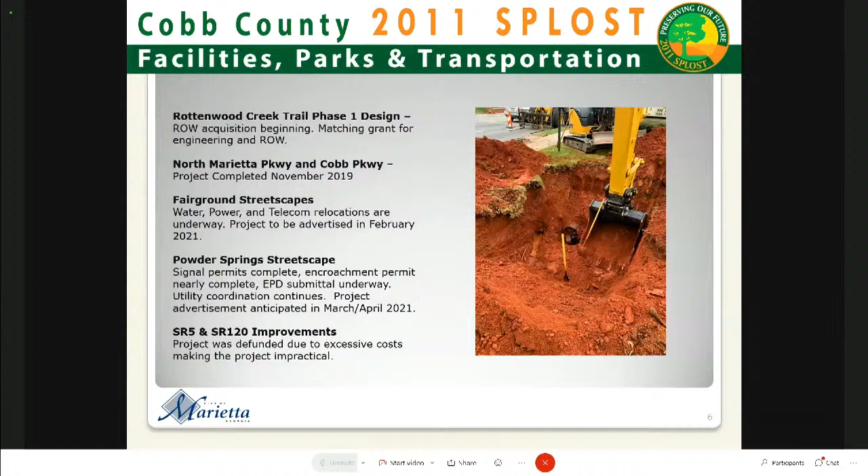Okay, then I'll move to the 2016 update. Last two pictures there we've already talked about, but I'm moving to 2016. Finance has already told you we've received for 2016 more than what we have spent so far, so we're doing good on that. Our finances are holding strong at this point for the 2016 SPLOST.

Go ahead and move to the next slide, please. And the next slide. These are some of our projects that we've completed since the last time we met with you.

We've completed our intersection improvement at Sawyer Road and Canton Road. Also the Kennesaw Mountain Gap Trail project that we had over on Manget, we have completed that now.

We also had a major drainage pipe repair and pipe relining over on Allgood Road there at the corner of Allgood and Cobb Parkway, so we've got that one completed. We had another drainage repair and upgrade over on Church Street right off the square, so we got that completed.

Hickory Drive was during our resurfacing this past summer. We had some issues there with the road being very soft, so we had to go in and do some stabilization with some more base work, and so that was that project.

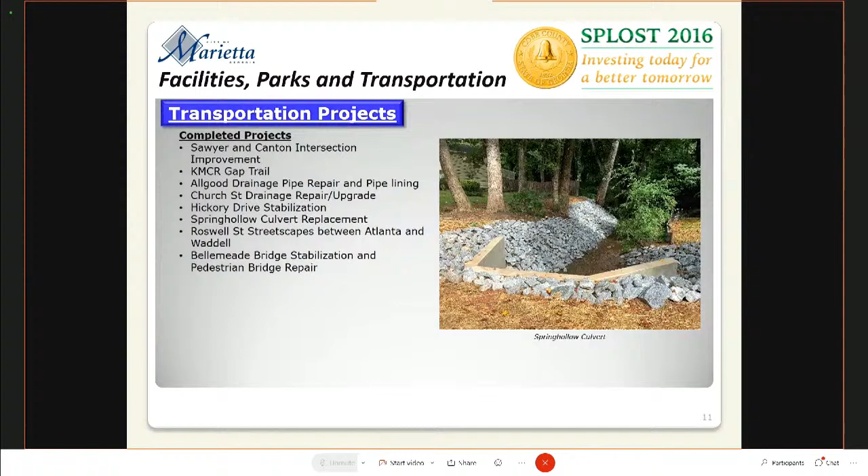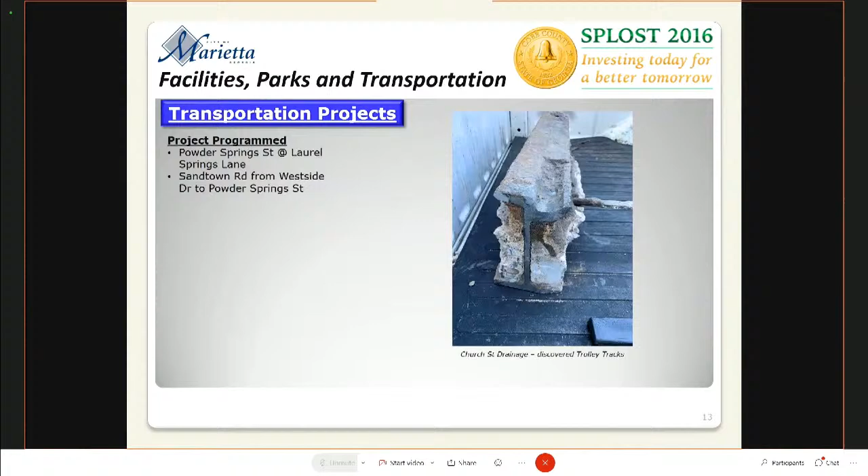So that's all I have for the 2016. I'll be happy to answer any questions if anybody has any for 2016.

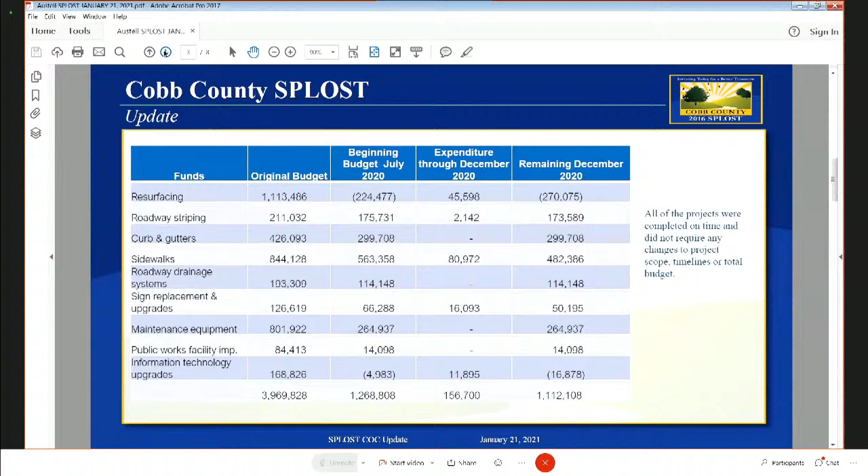On the following slide, you can see the breakdown of where that money was spent. It's primarily resurfacing and sidewalks—that's what 50% of our transportation budget was for, and that's mainly what we spent. We also did some sign replacement and upgrades. The following slide shows the specific roads that were resurfaced, where we installed sidewalks, more specifics about how that money was spent, and the next slide gives you a visual of those. You can see several of the things we did were for ADA compliance, also compliance with reflective signs—that's an ongoing project throughout the city.

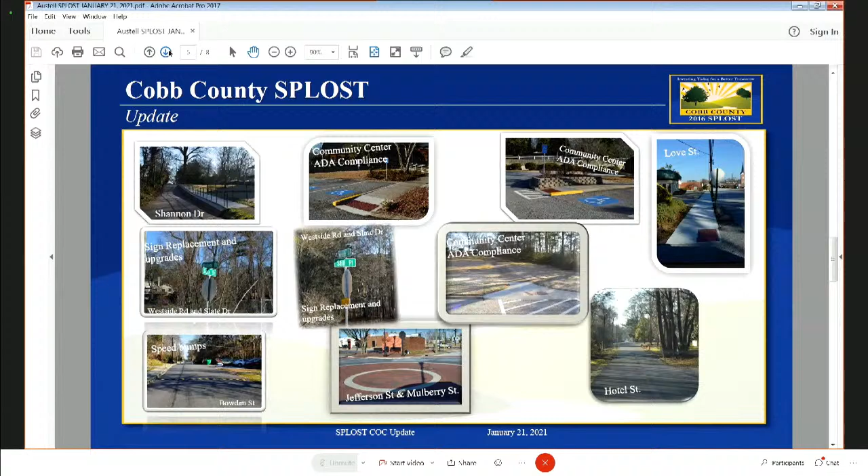Hello, good afternoon, this is Lindsay Edwards, thank you for that. Just a quick question on the new vehicles: I know there was an initiative before from, I believe, the Cobb County office to include some license plate readers on the newer vehicles they were acquiring. Have you all instituted that with the new vehicles, and do you coordinate with Cobb County on that?

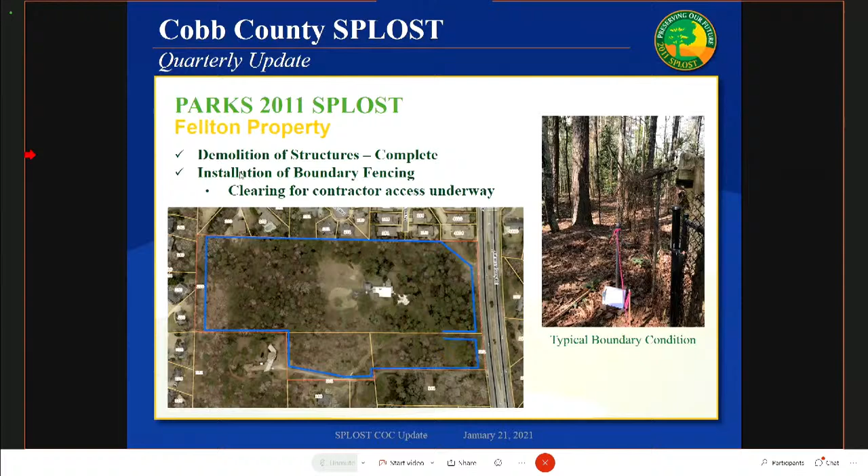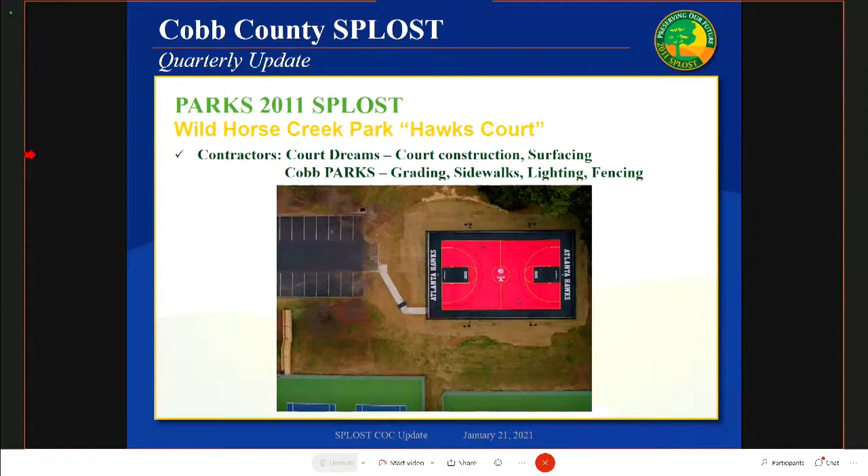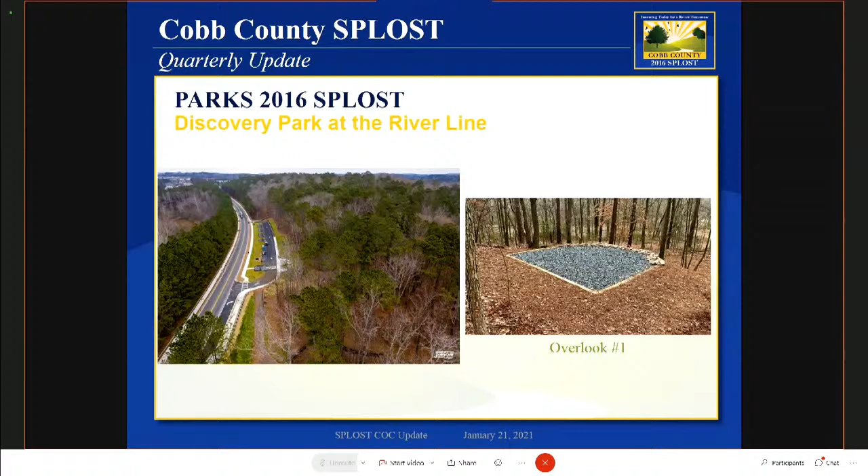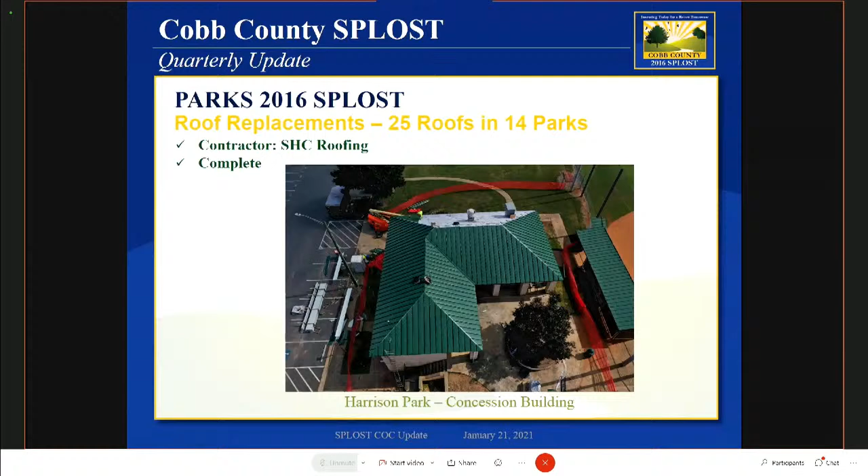The next slide shows a couple of pavilions at Lost Mountain Park. The one on the left is the Upper Hub, Pavilion number 2 at Lost Mountain, and the one on the right is the Lower Pavilion at the Lower Hub. You can see they're existing older buildings that now have brand new roofs, so they'll continue to become even older buildings because they'll last a lot longer with a nice new roof.

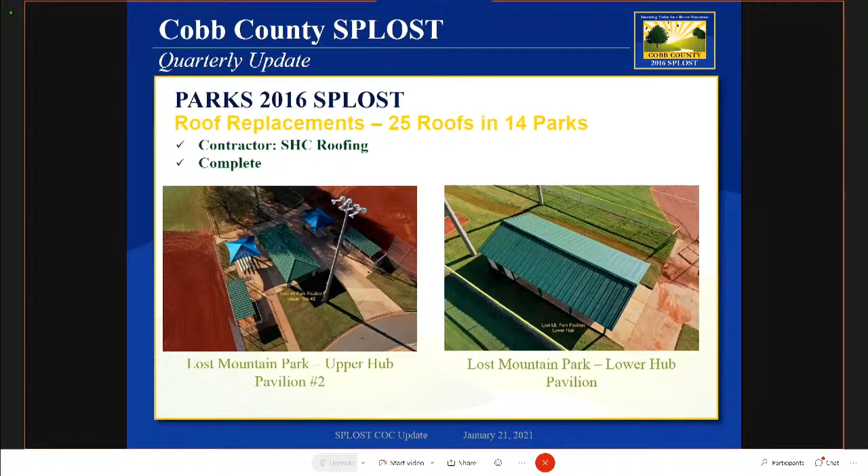This was an excellent contractor, and they just did a really good job, kept to their schedules, high quality materials that we spec. They had no trouble putting them all on, and this has been a very successful project.

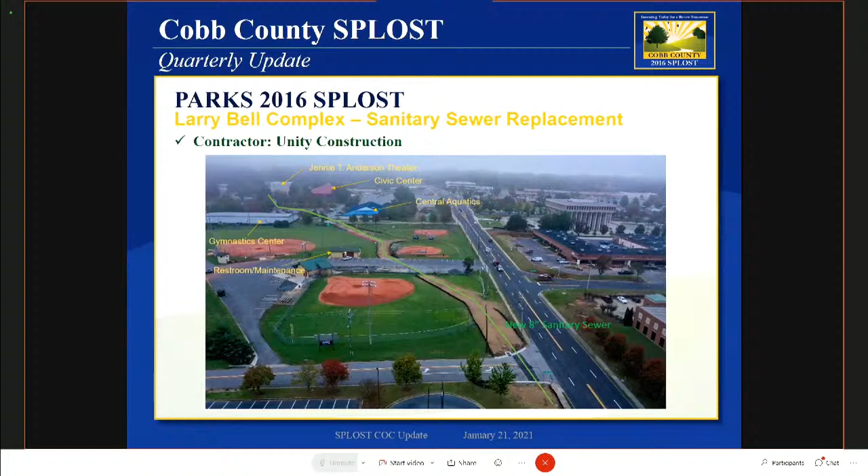This picture was taken on a rainier day back in early fall. The next picture shows it from the opposite direction once it's done — you can see it runs from the Civic Center to the theater. We had to cut some concrete, go across a grass area, across the parking lot, some more grass, and so on, all the way down to Glover Street. So this is one of those projects where you couldn't see any real difference above ground before and after, but it's an excellent project.

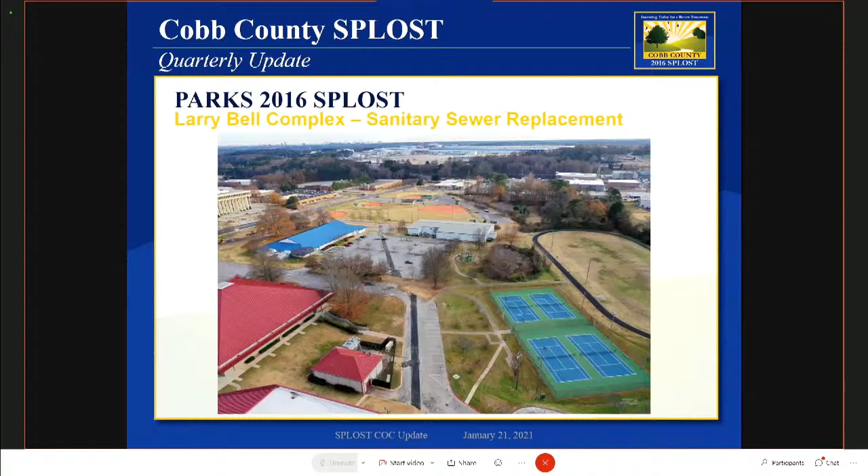Again, a good contractor, Unity Construction, and this one is complete. We permitted this one through the city of Marietta, so we appreciate their help.

I think I've shown you a couple of these as well. We're about 30% done with the installation of our security cameras at our facilities. This one shows the coverage inside and outside of our parks admin complex, which is our main office building, and then our shop, with coverage of all our storage and vehicle and material storage out back.

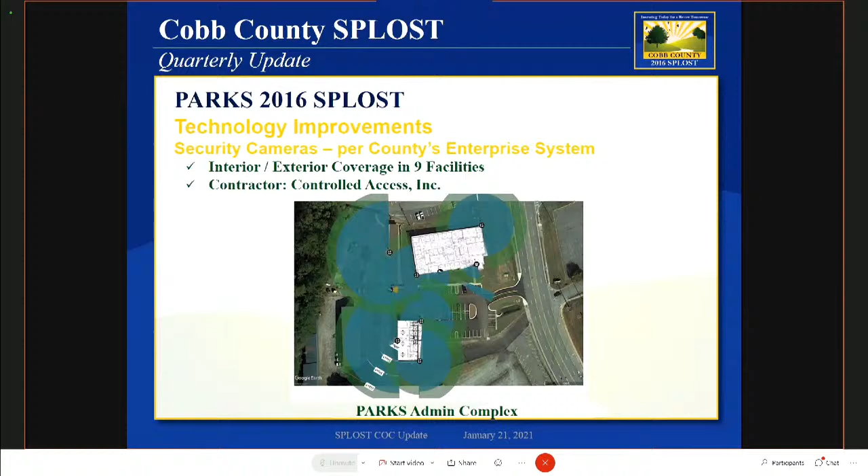The next slide shows what it looks like on Michael's computer. He selected a few camera alignments pointing to the back of our facility, showing the barns and storage areas, et cetera. This records and holds the recordings — you can see it in real time, but the Parks Department doesn't have access to the recordings. We'd only want to look at those if there's something to look at, typically involving public safety, and that data is inaccessible by parks. It's kind of like the license plate readers we talked about last summer that were installed — they're in our parks and help keep everybody in line and safe, but we don't have access to the data. It's all in support of a public safety effort.

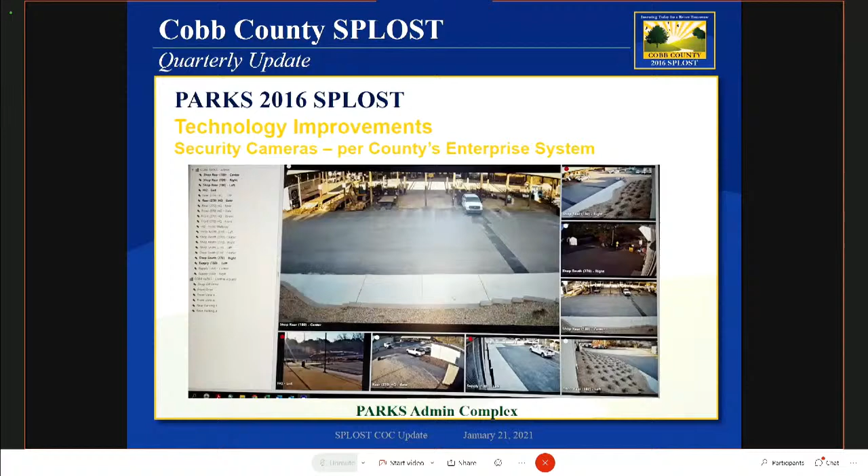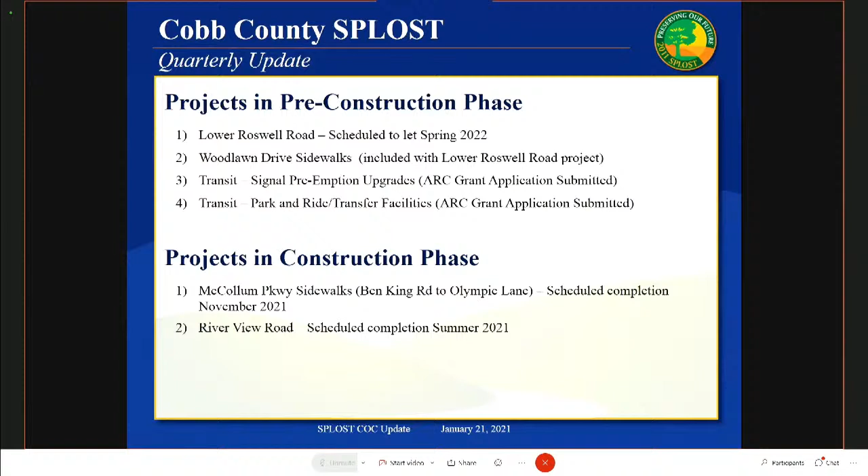Next slide, please. So there are still a few outstanding issues in the 11 program. We have 14 total projects still in some phase of not being substantially completed. Then we have 3 that still have utility prior rights issues with Georgia Power, and 3 that have some right-of-way claims and condemnations, which could increase depending on these 14 projects.

So out of what we just mentioned, there's 20 total active projects at $21.9 million remaining. We're going to work really hard to close that program out by the end of 2024.

Okay, so if we jump into the 2016 program, I'd say we've done a pretty good job of staying ahead of where we planned to be. Out of the 260 projects, we've got 173 completed, 40 in construction, and 39 in design. And then we have a handful we'll talk about that still need to begin some form of concept or design.

So this is a location of where all those projects are in the county. The green are the projects in design or pre-construction, and the blue are the projects in the construction phase. That was as of December of last year. And we mentioned that we have 173 of those projects that have been completed.

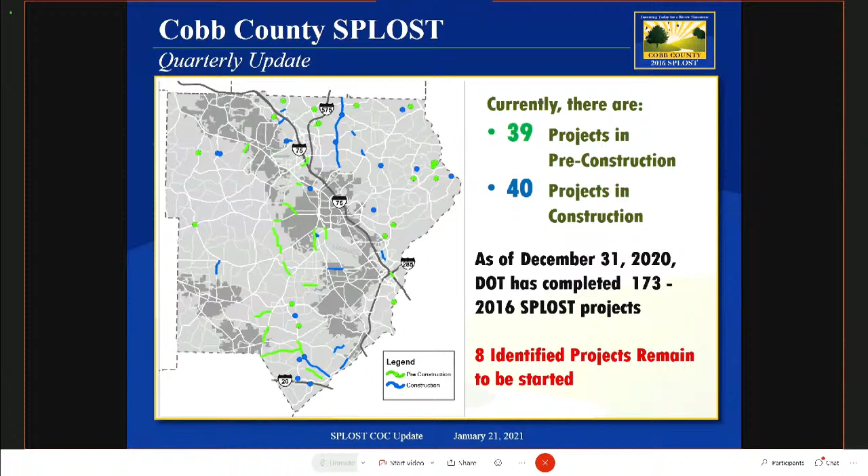Next page. This is a highlight of one of the projects that Mark had mentioned with the City of Marietta. This is our joint project for the Old 41 Highway Bridge over the CSX Railroad. This is a great project with C.W. Matthews as the contractor, and hopefully completion will be summer of this year, 2021.

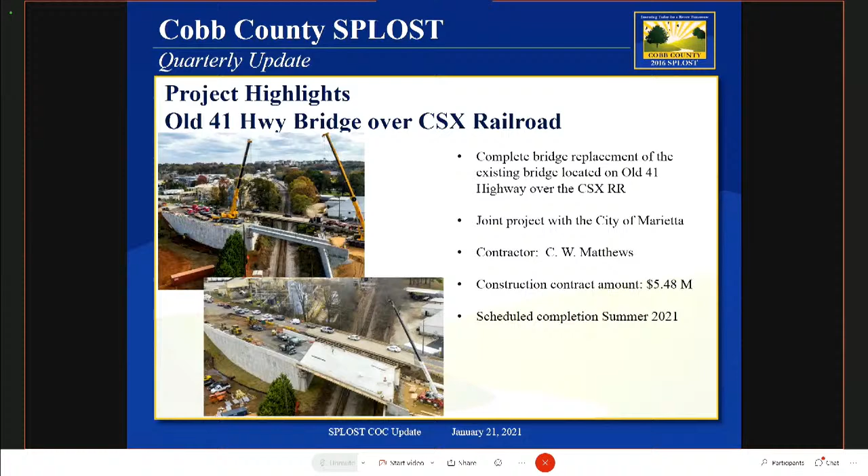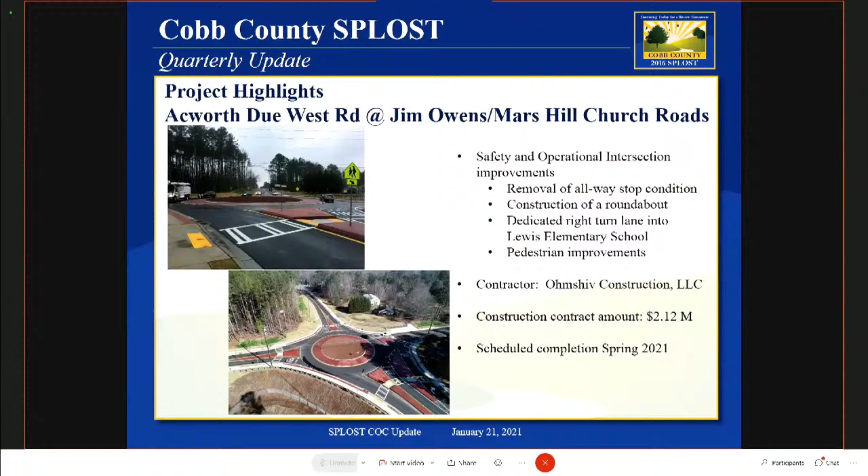Next slide, please. We have another project. This was Acworth Due West at Jim Owens Road at Mars Hill Church Roads. This was a safety and operational improvement. We also worked with the school board for the elementary school at Lewis Elementary, just down the street. We installed this roundabout and removed an all-way stop condition. The contractor was Ohmshiv, and we're not substantially complete, but we're pretty close. So we should close this project out this spring.

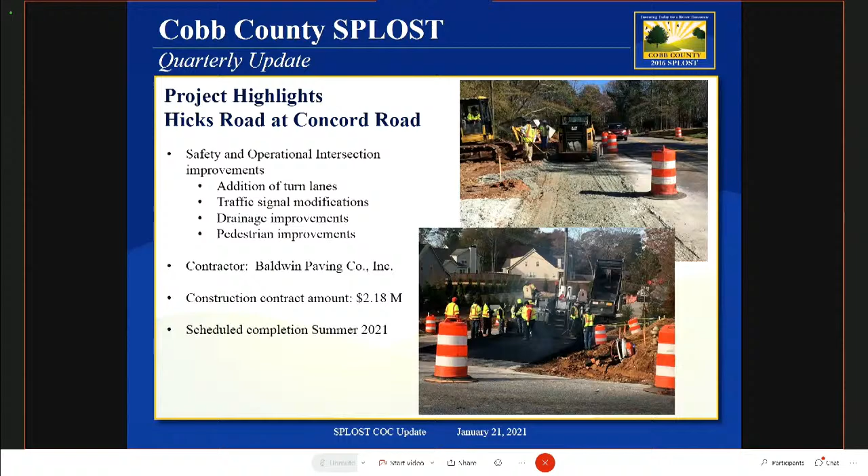This is Hicks Road at Concord Road. It's another safety and operational improvement project. We're adding turn lanes and a signal modification, along with drainage improvements and pedestrian improvements. This is a project that Baldwin Paving is doing for the county, and it's scheduled for completion summer of 2021.

This is Lost Mountain Road at Midway Road, Mirror Lake Drive. It was actually completed November of 2020. It looks really nice in District 1. It's a safety and operational improvement where we realigned Lost Mountain Road and Midway Roads, created a four-way signalized intersection, and added the signal and turn lanes. This project was completed by C.W. Matthews, and we recently completed that and it's operational.

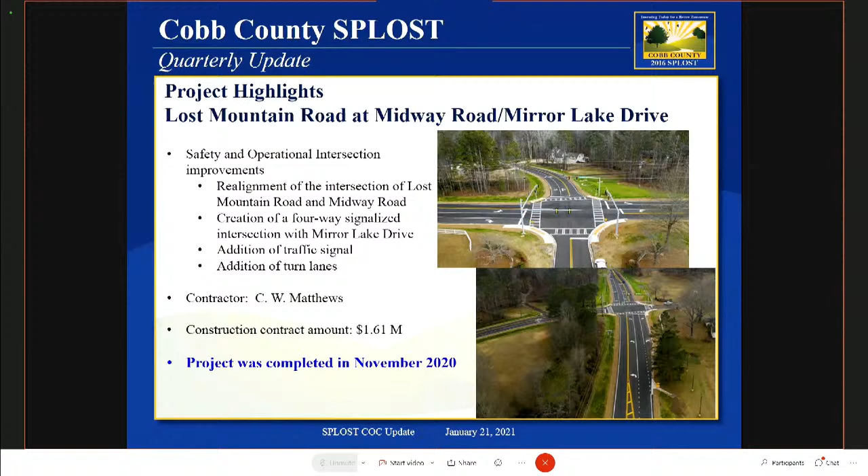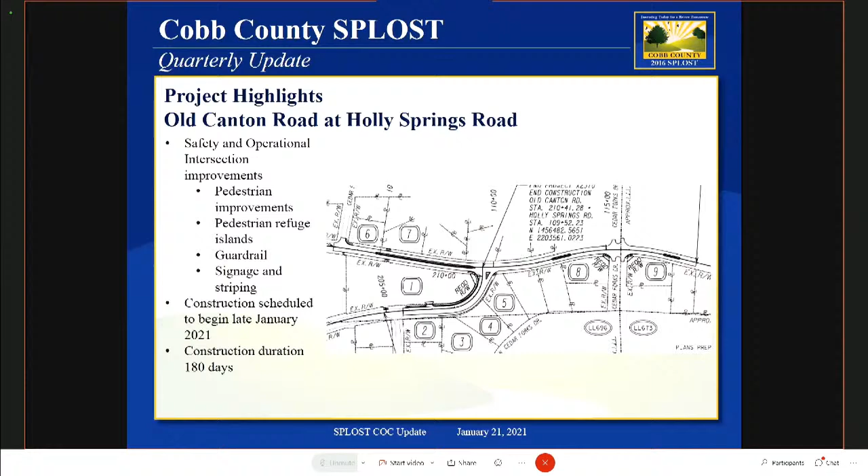Next slide, please. This is a visual of Old Canton Road at Holly Springs Road. This will also be a safety and operational improvement project. We're going to have pedestrian improvements with some pedestrian refuge islands, install a little bit of guardrail, and some signage and striping. This project should begin late this month, before the end of the month, and it's a 180-day construction duration.

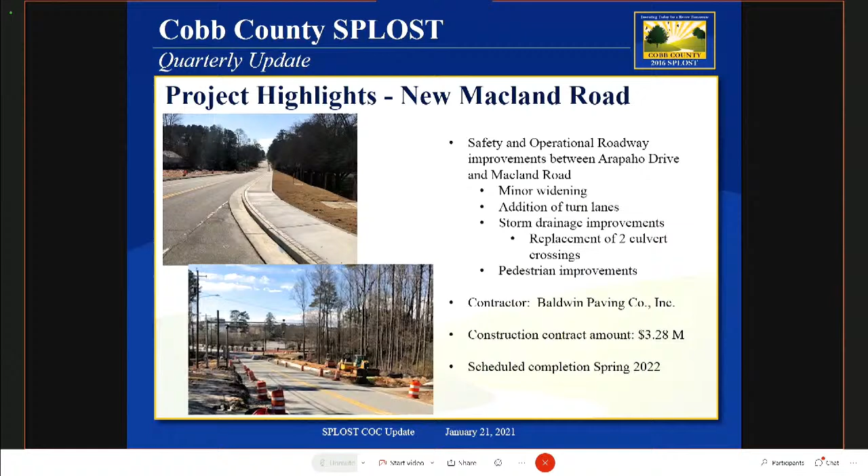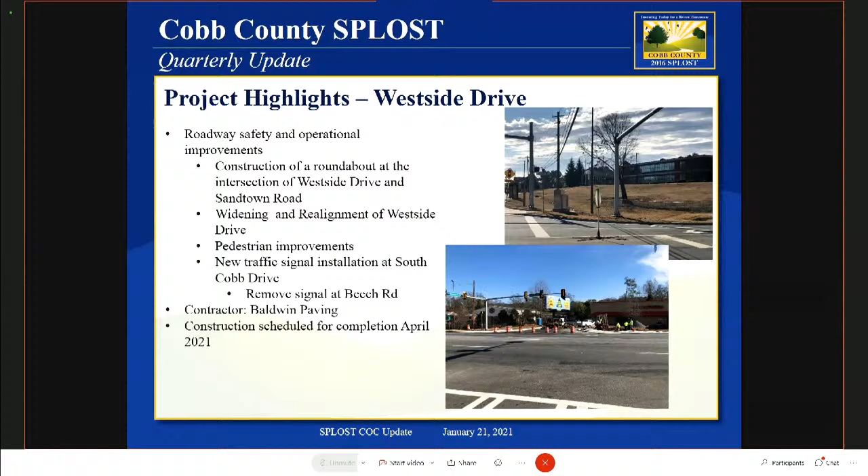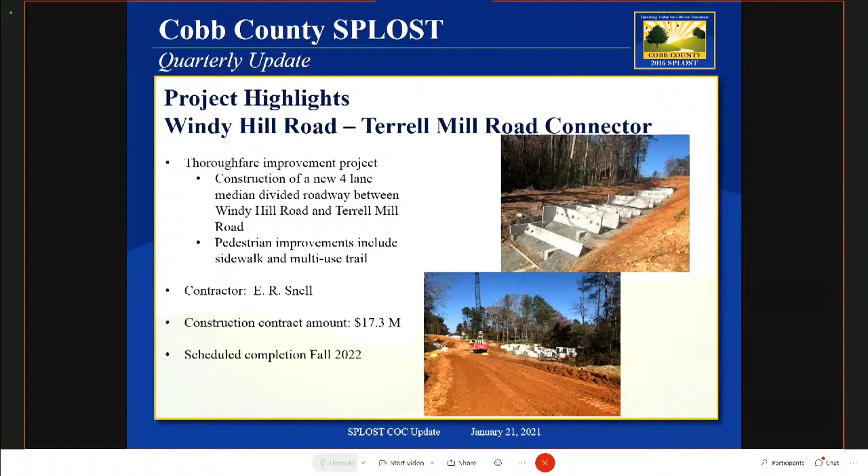This is another large project. We were sad that we weren't able to have a groundbreaking ceremony for this project, but fingers crossed we'll be in a different place in the fall of 2022 where we'll be able to have a ribbon cutting. This is our Windy Hill Road, Terrell Mill Road Connector Road. This was a large thoroughfare improvement project where we're constructing a new 4-lane median divided roadway that'll run between Windy Hill Road and Terrell Mill Road, with pedestrian improvements including sidewalk on one side of the road and a multi-use trail on the opposite side. This project is being constructed by E.R. Snell. It's a large project, $17.3 million for the construction cost, and it should be complete fall of 2022. We'll definitely hold a ribbon cutting, and hopefully maybe take a field trip out there if the group would like.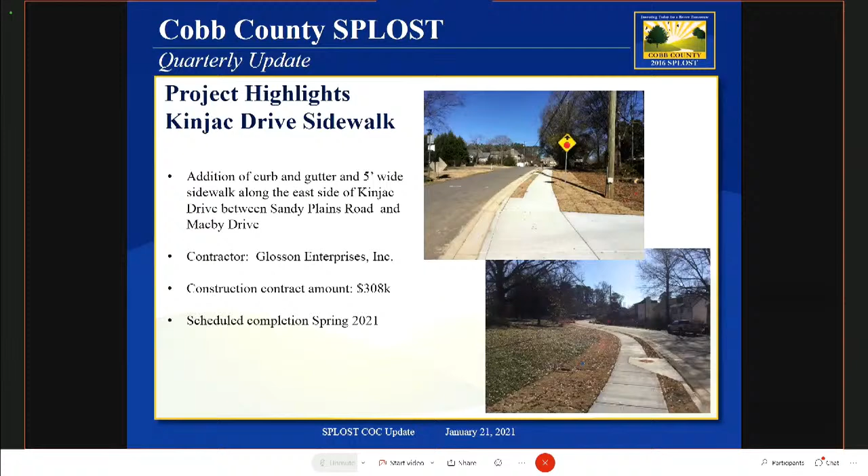Next slide. This is a sidewalk project for Kinjac Drive. We added a curb and gutter and a 5-foot wide sidewalk on Kinjac between Sandy Plains and Macby Drive. Glosson Enterprises is the contractor, and it should be complete spring of 2021.

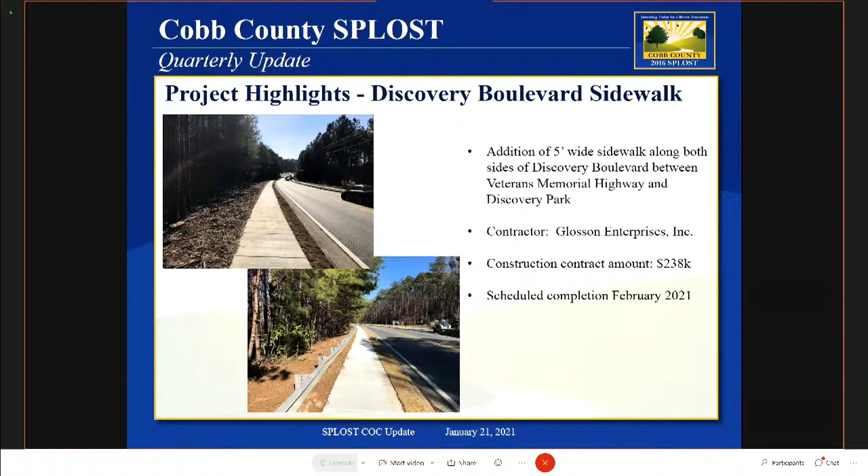We have another project, the Discovery Boulevard sidewalks, where we're adding 5-foot wide sidewalks on both sides of Discovery, running between Veterans Memorial and Discovery Park at the Riverline. This is Glosson, and it should be complete next month.

So what we have planned for this quarter, hopefully we'll have 15 projects complete: 8 drainage, a traffic ops, a roadway project, resurfacing projects, and some sidewalk work. We'll start construction on 6 drainage projects, an intersection improvement, and 2 pedestrian projects. Then hopefully our design will have starts for 2 drainage projects and 2 sidewalk projects.

So with that, does anyone have any questions?

April, I'm here if the chair—this is Jay. You there? Go ahead. Yeah, the roundabout that is going in at McCollum—Ben King, yes sir—can you give me the parameters of going forward on that, and then also maybe tie in the sidewalks on McCollum?

Okay, let me pull that and email it to you. Absolutely, I don't want to tell you the wrong dates. Yeah, I'll send it out. Perfect, just send me an email. Appreciate that, April. Appreciate everything you do. Yes, sir.